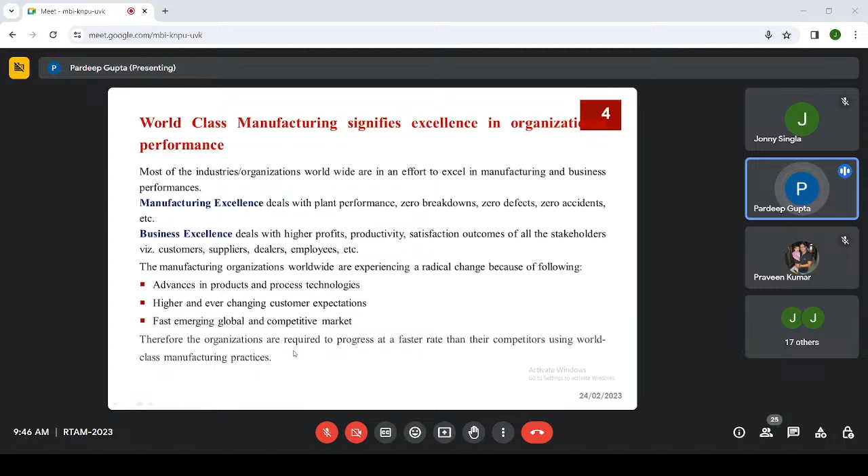There are advances in product and process technologies; both products and processes are advancing in a very rapid way. Higher and ever-changing customer expectations, which continuously change with time. And because of the global competitive market, there is cutthroat competition to reduce manufacturing cost, deliver better quality, and add new features. Therefore, organizations are required to progress at a faster rate than their competitors using world-class manufacturing practices.

Under world-class manufacturing, there is the concept of smart manufacturing. Smart manufacturing refers to the use of advanced technology and data analytics to improve the efficiency, productivity, quality, and flexibility of manufacturing processes. It involves the integration of various cutting-edge technologies such as automation in manufacturing and business operations, Internet of Things, artificial intelligence, machine learning, robotics, 3D printing, etc. These technologies may help produce goods more efficiently with higher productivity across the value chain. That is why 3D printing has great importance.

And this course is very relevant in giving information to the participants, either to have discussions with students on 3D printing, or if somebody is interested in adopting this as a research area for their PhD or MTech thesis. So this course will be very beneficial to them.

What is additive manufacturing? Additive manufacturing, commonly known as 3D printing, is a revolutionary manufacturing process that adds successive layers of material to create a final product using digital 3D models. This technology has gained significant attention due to its versatility, cost effectiveness, and potential to transform manufacturing and other applications.

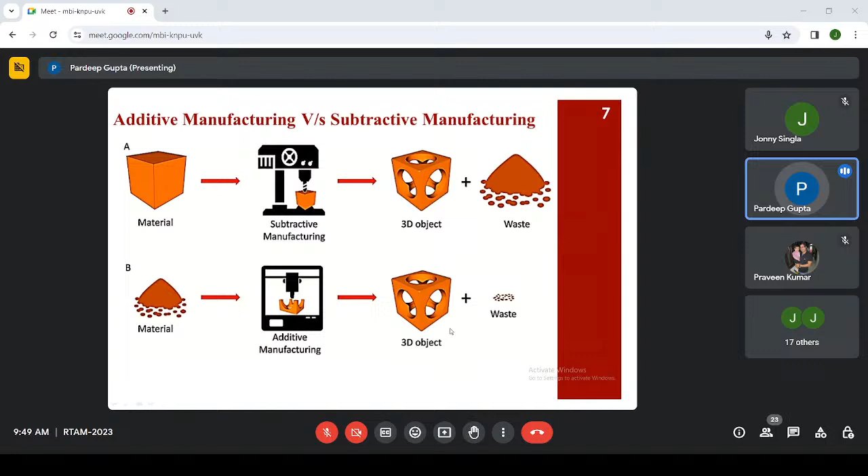So how does this additive manufacturing process work? Initially, we have to create a 3D CAD model using some software available in the market. This 3D CAD data is cut into numerous sections, and these sections are printed one over the other to get the final component.

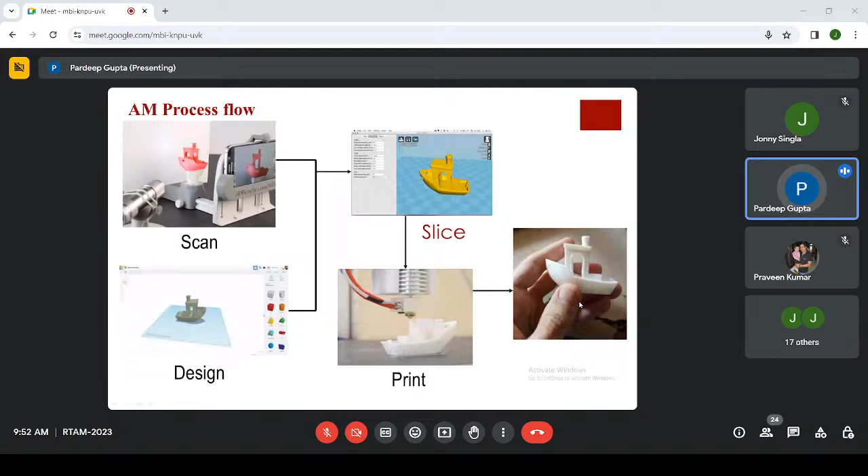This is again the same thing. First, through scan, we can scan the 3D object. From that, we can prepare the 3D model. Then slicing is done. After slicing, through this printer, the printing is carried out. That is how this 3D printing process works to create required components or parts.

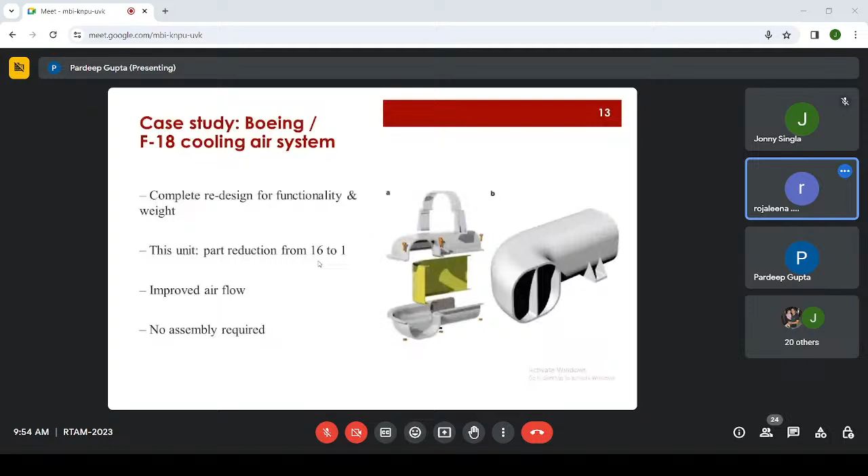When we are designing this product, the stress, fatigue, impact strength, etc. are all taken care of. So naturally, the components fabricated with the additive manufacturing process are better than the parts manufactured by the conventional machining process.

So all these things are taken care of during the designing of the 3D model of the additive manufacturing parts to be manufactured.

So now we will discuss the opportunities of utilization of 3D printing.

Overall, 3D printing technology continues, and its applications in engineering and manufacturing are expanding rapidly, offering new opportunities for innovation and efficiency across numerous sectors.

As you can see, there are a number of possibilities for applications of 3D printing.

It can be used in making prototypes, toolings, and jigs used in industry. Even supply chain optimization, repair and maintenance of equipment, automotive and aerospace have a lot of use, consumer goods, product customization, low volume product production.

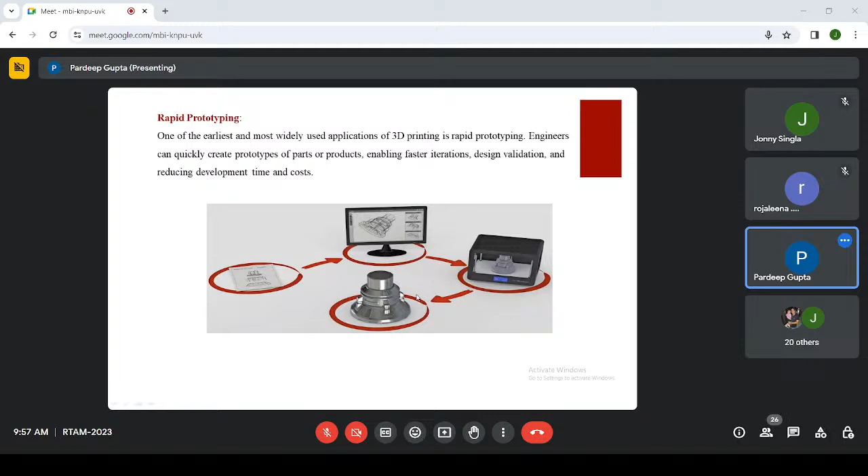So customization - 3D printing can be used to customize products. These may be needed in various areas, for example, in healthcare.

In healthcare, if somebody needs some plaster or some extended part of the body, that can be fabricated with 3D printing as per the size required for the specific person.

Again in medical, some components can be fabricated by additive manufacturing. In dental, 3D printing is being widely used in dental applications.

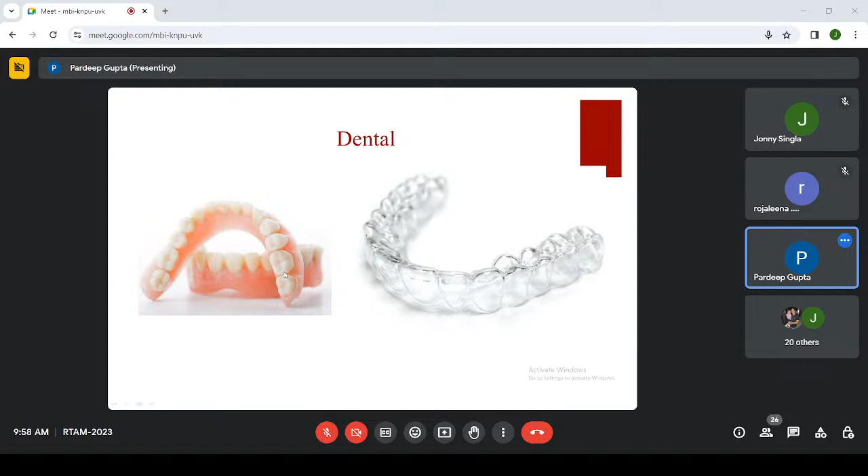In preparing jaws and some implants, etc. Even hip bones can also be created with the 3D printing process.

In construction and architecture also, 3D printing is now advancing like anything. Bridges, some houses, and small scale models of buildings can also be created with the 3D printing process.

In the food industry, 3D printing is finding applications in making cakes, being used for making layers of chocolate or cream over the cake.

Where some props have to be created, this additive manufacturing technology can be used to create a few items as per the requirement.

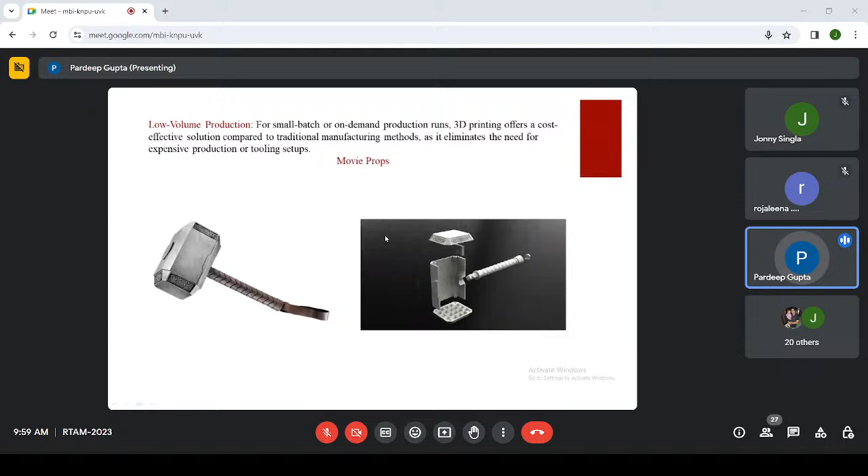Next, 3D printing is finding big applications in the automotive and aerospace industry.

These industries benefit from 3D printing for lightweight and complex parts, enabling design optimizations that can improve fuel efficiency, performance, and reduce overall weight.

In the case of aircraft, the total assembly can be created with the help of additive manufacturing. 3D additive manufacturing is finding big applications in aerospace.

So whenever some space shuttle is being launched, the 3D printer goes along with that.

So that if any damage takes place to any component during the journey, it can then be fabricated by making use of the 3D printing process.

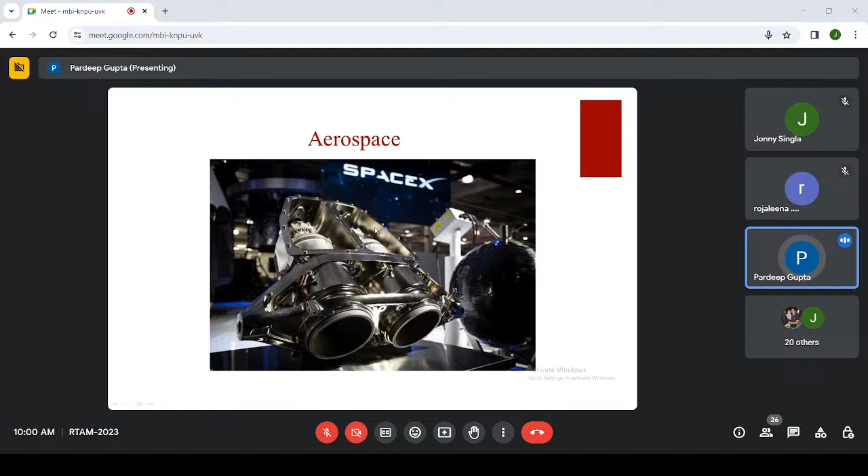So it has good applications in the aerospace industry also. You can see in space shuttles, the printers are being used to make some products to maintain the spacecrafts, etc.

In making some consumer goods like in the fashion industry, dresses can be created, some special dresses can be created by making use of 3D printing. In making some jewelry items, this technique can be used for making very innovative jewelry items.

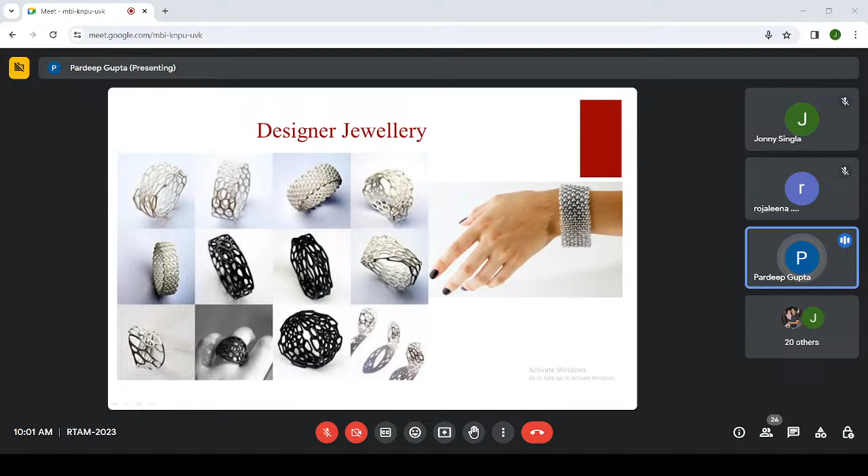Consumer products like your mouse or the cover of the mobile phone, some intricate parts or decoratives can also be created by making use of

additive manufacturing process. So these are some specialties which can be used in our homes.

Additive manufacturing can be a very useful technique in optimizing the supply chain. It allows for decentralized manufacturing by enabling production of parts or components closer to the point of use. Suppose I need a component to be used in Chennai, there's no need to construct that component in Punjab. It can be fabricated near the location where it has to be used, mitigating risks associated with centralized manufacturing.

In education and research areas also, 3D printing is finding wide applications. It has become an essential tool for educational purposes and research institutions, allowing students and researchers to experiment, visualize complex concepts, and develop prototypes for various experiments and studies.

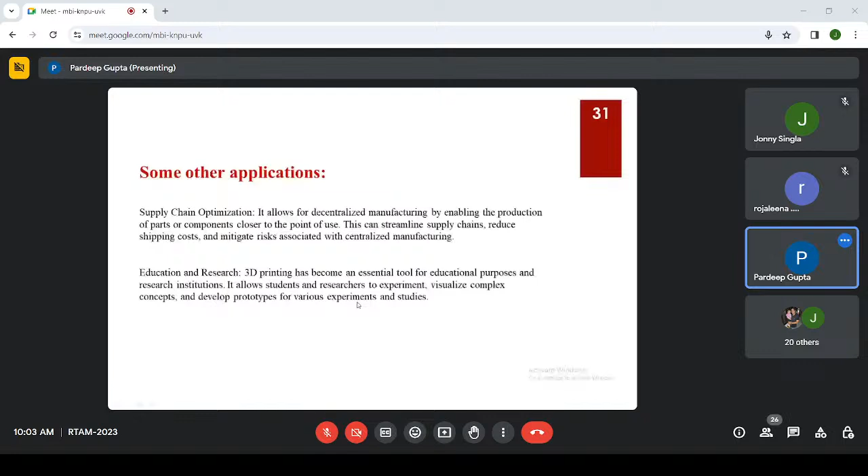Now we'll talk about the challenges associated with 3D printing or additive manufacturing. The first limitation is materials limitations. Conventional materials cannot always be used in 3D printing because of strength issues and finishing issues. The range of materials available for 3D printing is still limited compared to traditional manufacturing. Developing more diverse and high performance materials suitable for different applications remains a challenge, opening up possibilities for advanced composites, metals, ceramics, and biocompatible materials with enhanced properties tailored to specific applications.

Quality control is also an issue. Ensuring consistent quality across 3D printed parts is crucial, especially in industries like aerospace and healthcare where precision is paramount. Controlling factors such as porosity, layer adhesion, and surface finish remains a challenge. Sometimes 3D printed parts may not be as strong as those created with conventional machining because of layer-to-layer bonding and surface finish issues. These are the big challenges.

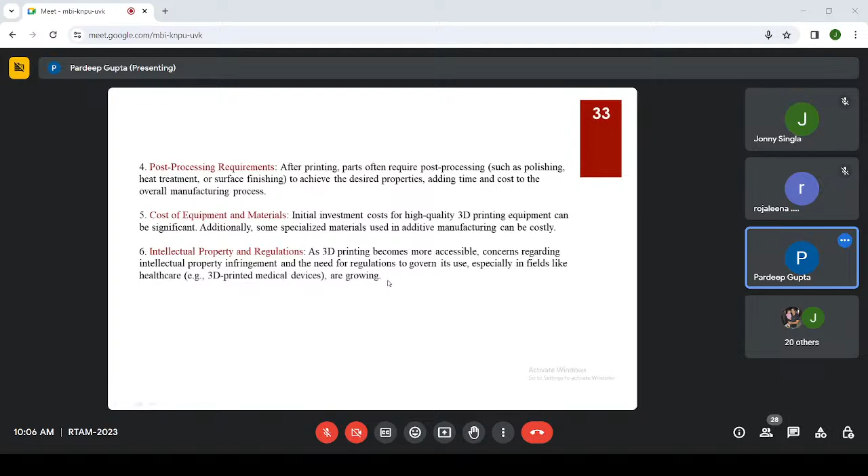3D printing offers a number of benefits, giving us some financial benefits as well as some technical benefits. Talking about financial benefits, the first one is getting products to the market at faster rates.

3D printing organizations can quickly and affordably produce prototype functional parts. Once a design is prepared, this technology can be used to produce tools, fixtures, and other parts that can produce products at a faster rate. By shortening the product development cycles, organizations can generate more revenues, basically making production processes faster.

Reducing manufacturing cost: manufacturing of components requires skilled labor, advanced machines, and traditional tooling that involves higher costs. Metal 3D printing increases flexibility in manufacturing and allows for producing complex parts with ease, helping organizations produce parts at more affordable prices.

Replacing inefficient manufacturing workflows: 3D printing metal parts will help organizations become more dynamic and responsive.

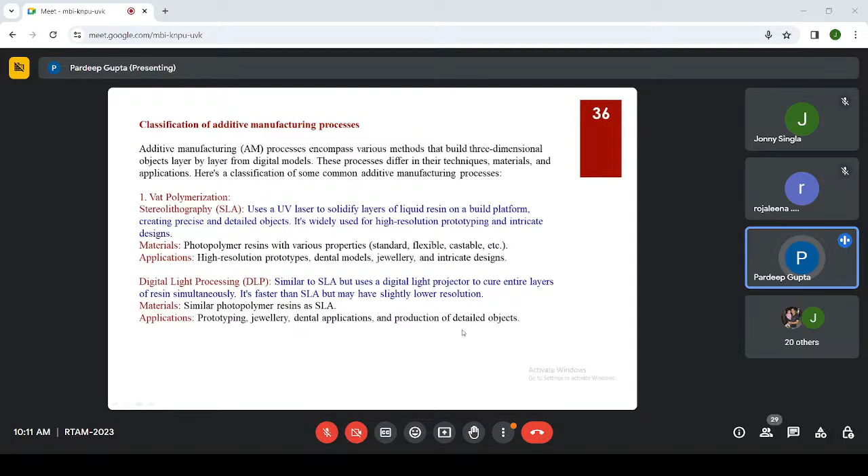The second category of processes comes under the heading material extrusion. It is a kind of extrusion process. The first process is fused deposition modeling, the FDM process. Basically in this process we are making use of filaments, which are extruded through a nozzle, and deposited layer by layer in the chamber to create the 3D models or objects. It is the most common and accessible method, extruding thermoplastic filaments through a heated nozzle layer by layer. FDM is used in various industries for prototyping, tooling, and end-use parts. The materials used are polylactic acid, PLA, ABS, and some other thermoplastics. The applications: prototyping, manufacturing, functional parts, educational purposes, and hobbyist use.

The next category is pellet extrusion. It is similar to the FDM process, but the only difference is that FDM uses thermoplastic filaments, while this process uses plastic pellets instead of filaments, offering potential cost saving and material diversity. Here mixing of the pellets is possible, so we can make use of this process in a better way as compared to the FDM process.

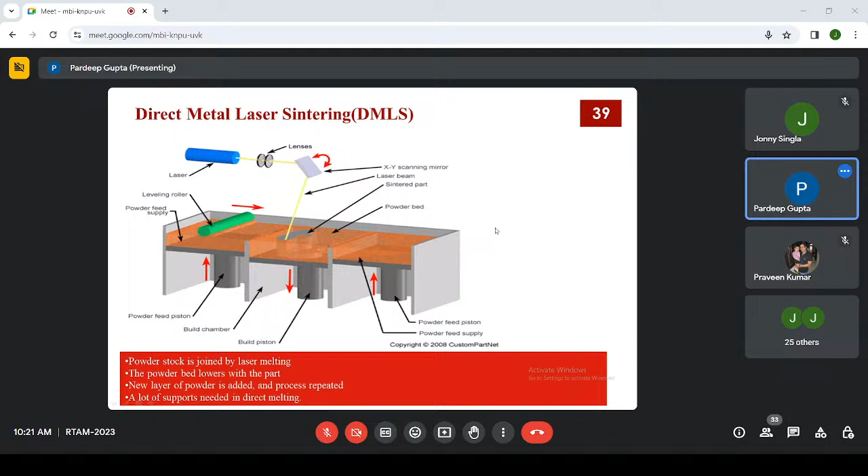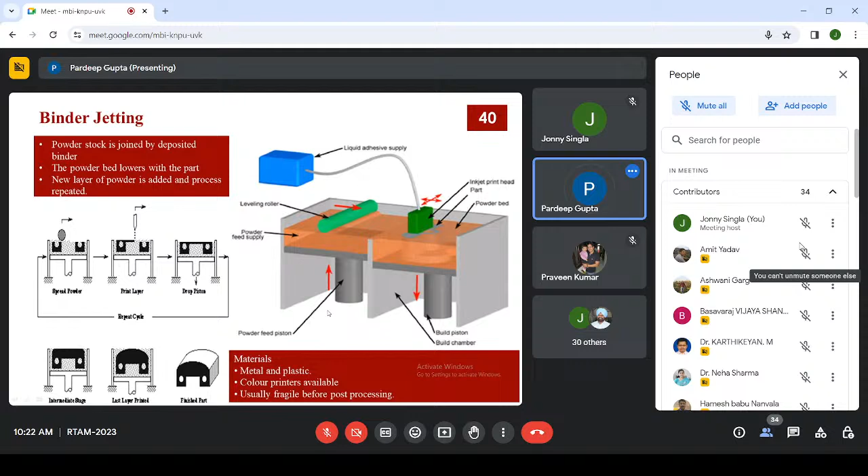Slowly a number of layers can be laid to create the final product. Slowly this build piston or build chamber will go down, and the final product will be made available for use. These are some of the examples created with the help of the binder jetting process.

In the welding area also, there is wire arc additive manufacturing. It is a kind of additive manufacturing process. In this process, the wire is being... wire arc additive manufacturing is basically a kind of welding process. In this process, we make use of a robot. This robot is configured to make layer upon layer. Here in this figure, you can see a number of layers are laid to make this block.

So in this, we can make use of stainless steel, nickel-based alloys, titanium alloys, and aluminum alloys. Some special metals can be used for making the end products for some specific applications.

So with the help of this robot, this is using a tungsten electrode, and a metal wire is coming to the hot area. So this weld pool is being created, and we can lay the layers like this. So very complex solid components or maybe walls can be created by making use of this process.

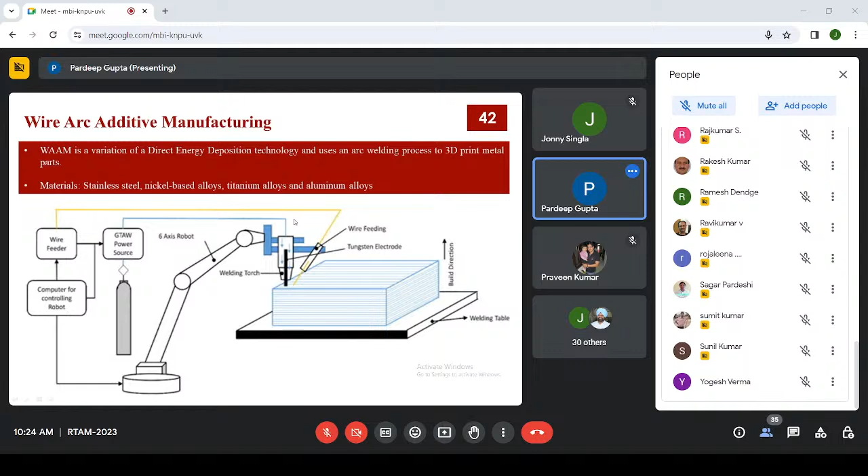So basically at SLIET Longowal, we are having this machine with us, and a good number of people are working on their PhD thesis, as well as some MTech theses are going on with this machine.

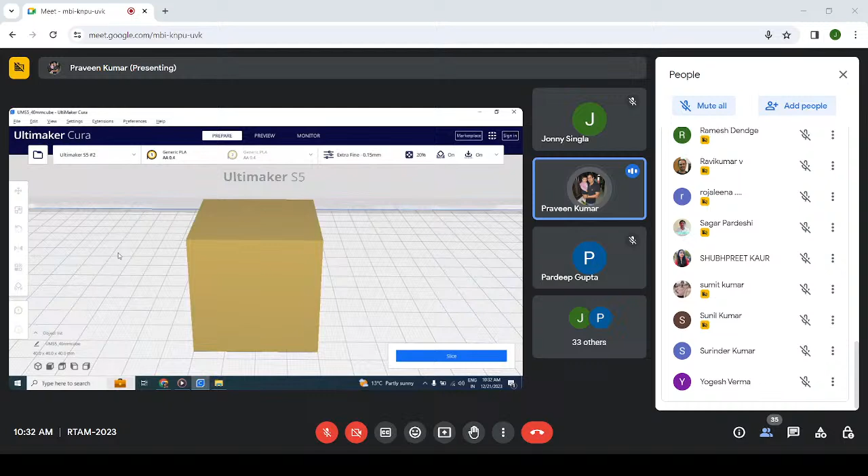One of the famous slicing software is Ultimaker Cura. I have already downloaded this software, and I have already uploaded the STL file of the model from the previous one. So I'll tell you this from the scratch point of view. From the laptop side, you can see the number of printers, and you can add your printer too by clicking on add printer.

When we click on add printer, we get some options like add network printer or add non-network printer. Please go to add non-network printer. Here you can find various brands of printers already listed in this slicing software. So you can choose your brand, and accordingly you can register your printer into this slicing software. Like we have Ultimaker S5 in our laboratory, so I'll choose this Ultimaker S5, then I'll add this. So the Ultimaker S5 is already added.

After that, we need to just upload this STL file. I can show you how I have uploaded. File, then open file, downloads. This is the STL format file, and this is how I have uploaded it.

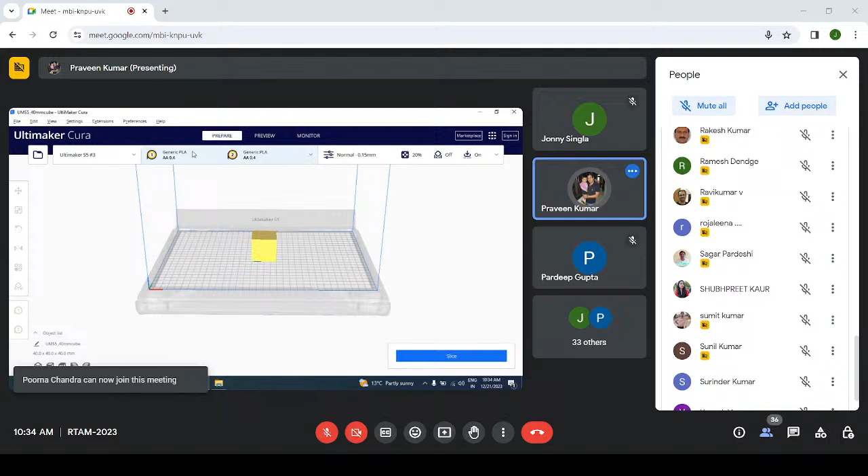After uploading, as Ultimaker S5 is a twin extruder, meaning it has two nozzles, we need to define from which nozzle we have to print. We can see here there are two nozzles, 1 and 2. You can enable either 1 or 2, or if you want to print with different colors, you can enable both nozzles. So one layer can be printed from one nozzle, and another layer can be printed from the second nozzle. For this nozzle, you can choose the material too.

Like here I have chosen the PLA material. You can use other materials like ABS, nylon, PC, PETG, PLA, and others. Besides this, we have to mention the print core. Print core means the nozzle we are using. Here we have already chosen the AA 0.4. 0.4 indicates the diameter of the nozzle. Here you can use the 0.2 diameter nozzle, and here you can use the 0.8 diameter nozzle.

And AA defines the nozzle's material. AA is used for the polymers, BB is used for the supporting materials, and CC is carbon core, which is used when we are extruding reinforced materials like metals, carbon fibers, glass fibers. These carbon core nozzles are different from these other nozzles, because if we use the simple nozzle for extruding the metal

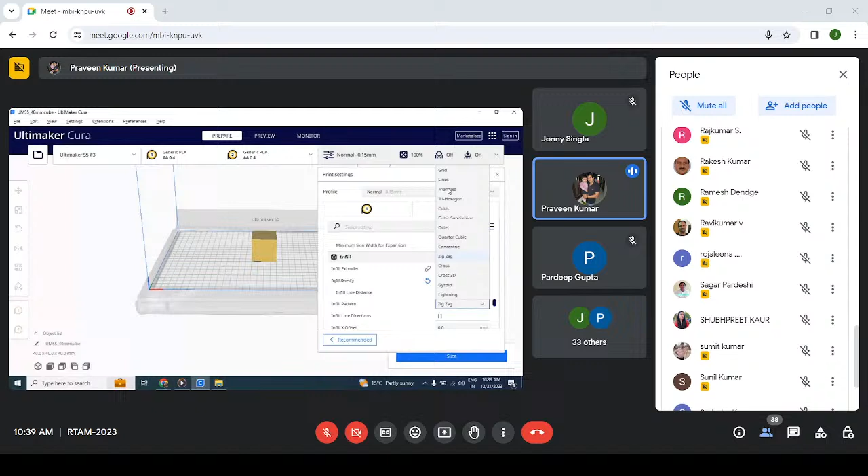And the material, the PLA, is generally melting at 200 degree temperature. We use the nozzle temperature as 200 degree, build volume temperature is 28, and the bed temperature is 60 degree. So there is no overhang part, that's why this function is not working here.

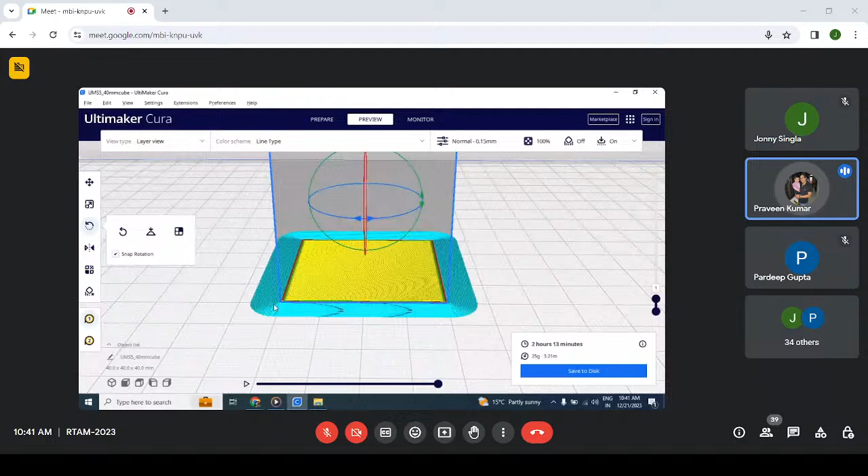Okay, now just slice it. I'll show you how this is going to work. From the blue part, you're seeing it. This is our brim. When we are adding the first layer on the surface of this build plate, it won't stick to the surface. So to keep the object adhesive to the surface of the build plate, we need to add this brim. This is only a single layer of the material, and it will keep the object adhesive to the build plate.

So here you can see the first layer, the red one, this is the outer layer of the object, and the green one, this is the middle layer of the object, and the yellow one, this is the innermost layer of the object. So these three layers combined are the wall thickness of the object. And in between these layers, the pattern is line. So they are all inclined at 45-degree. So this is the first layer.

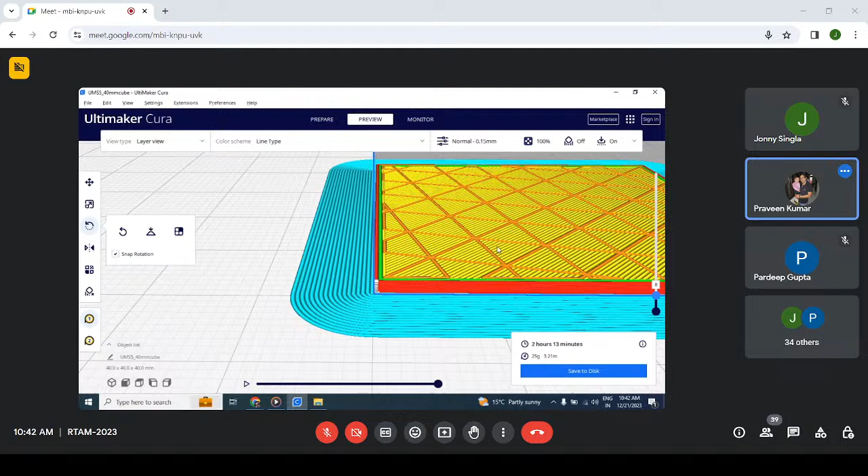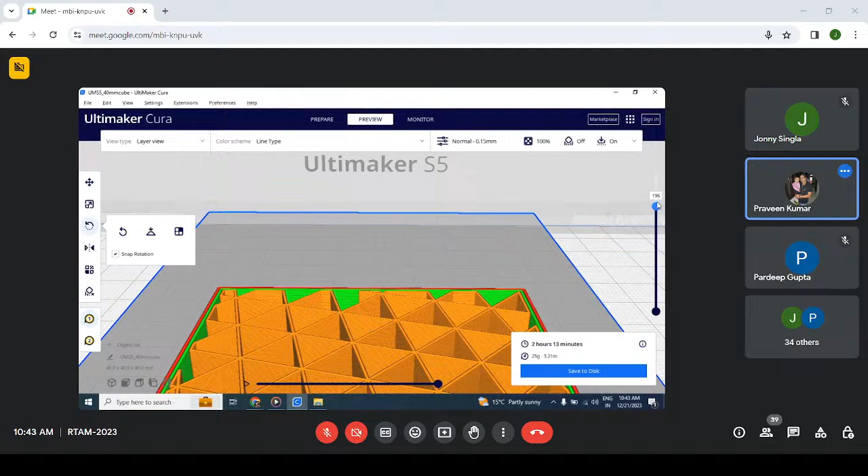And as it goes up, the uppermost 7 layers would be 100% infill. The topmost 7 layers would be the 100% infill pattern. These can also be changed. So here you can see these layers are aligned horizontally and parallel to the base edge of this object. So if your object is placed somewhere else, and that object is subjected to another kind of force, you can change the direction of these layers by inclining and positioning this object in some other styles. Like I'll show you.

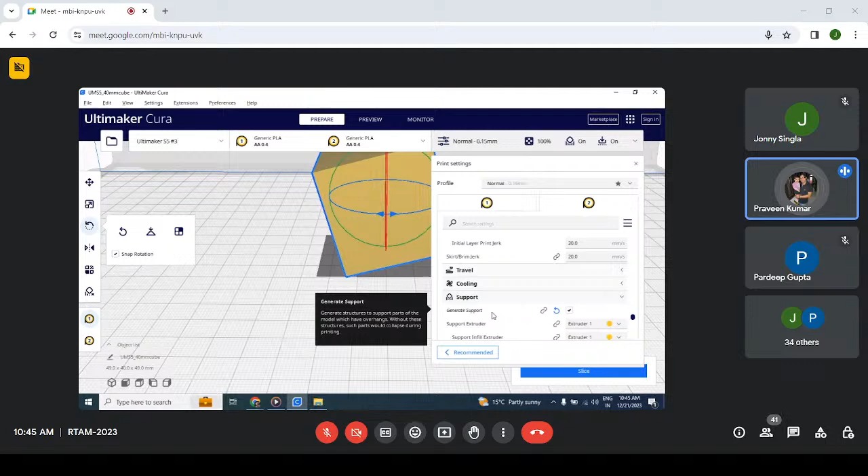Now I'll place this object at some angle. Okay. Now only one tip of this object is touching our build plate. So this part is overhang. So we need to support this part. So here we need to generate the support. So you can see when I tilt this object, then this function starts working. So I have clicked on generate supports. Now I'll slice it.

Now here you can see supports are created. Now the layers are inclined to the base edge. These are not horizontally parallel to this base edge. So according to the application, you can change this style of printing. And according to the point of application of the force, you can change the direction of these layers. So that is how you can get the strongest object with this kind of print.

So I have just made you understand how the printing parameters can be controlled, how temperature parameters can be controlled. All these settings have been done in slicing software. After the slicing, we just save this file to the USB, and we transfer this file to the printer. After sending this file to the printer, we'll start printing. I'll show you how I have done the printing.

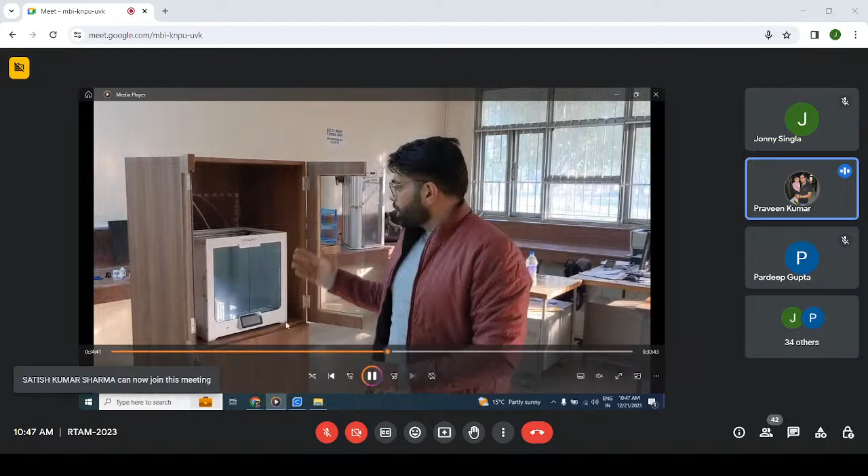So here you can see this is our Ultimaker S5 printer, and it works on dual extrusion. Now here you can see this is the metal filament, and it has a diameter of 2.85 mm, and this is a brass material that we are using. It is 83% metal and 17% polymer, and the polymer is added just to make the metal powder adhesive and in the form of a wire.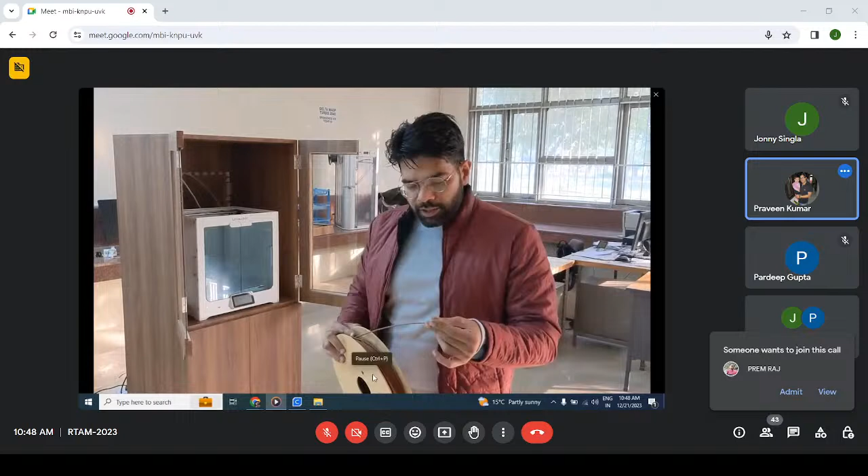So this wire has a diameter of 2.85, and this will feed into this printer to make the object 3D printed. First I'll show you how this wire would be fed into this printer. The fabrication of this wire can be done in an extruder, but this is a purchased one. Now I'll switch on this printer.

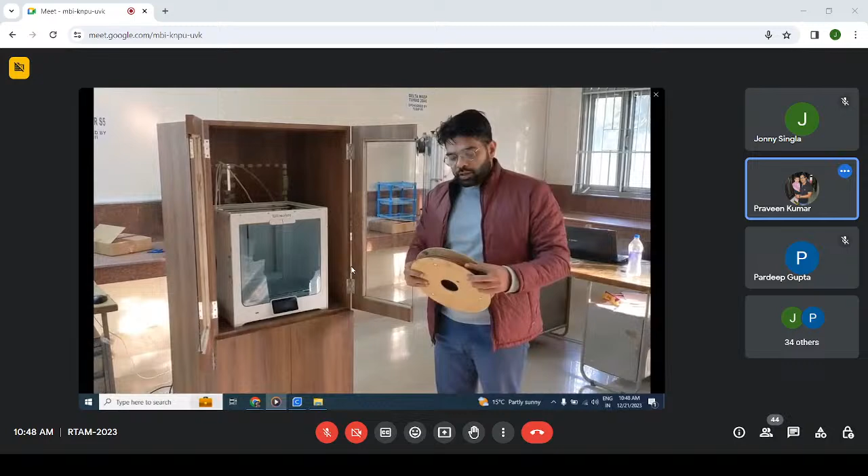This printer is working, the nozzle is moving in the XY direction, and the build plate has a movement in the Z direction.

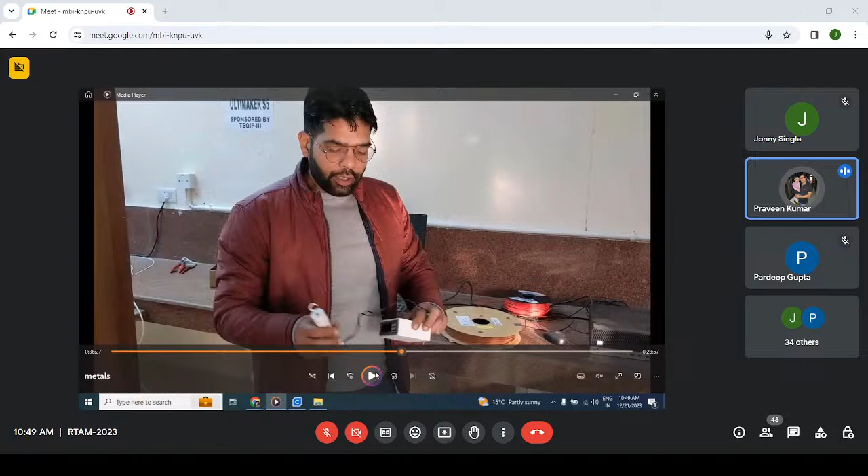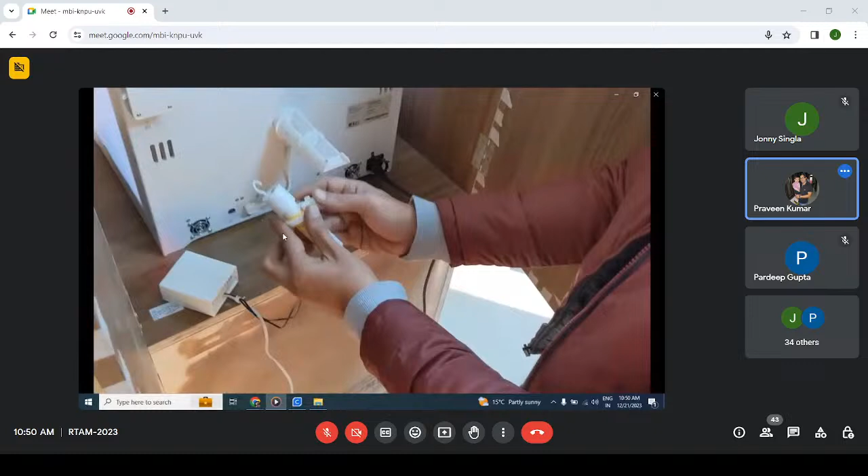So here you can see the temperature, and we will just place it. This is the bracket, and this bracket is also a 3D printed bracket. Here I already hung it, and we are just passing the wire through this warmer.

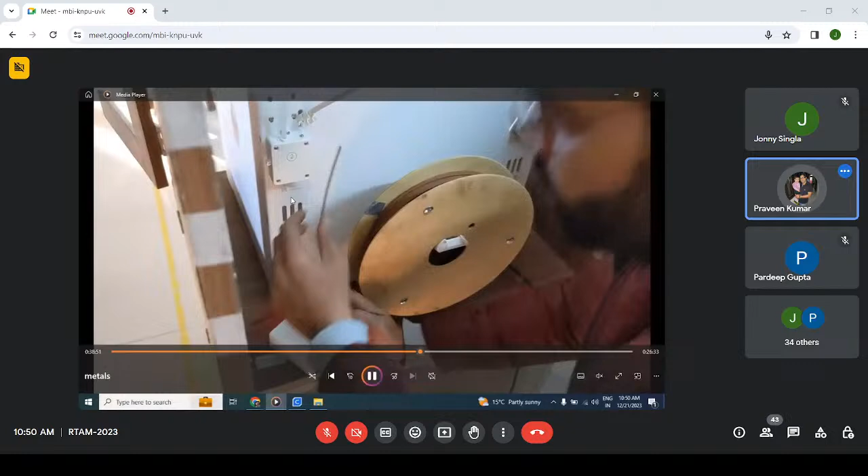After this wire passes through, we'll pass it through the feeder. This is feeder 2, and this is feeder 1. After the feeder, we just place it into the feeder, and we lock it, and it will automatically feed to the extruder nozzle. I'll show you how this is going to work.

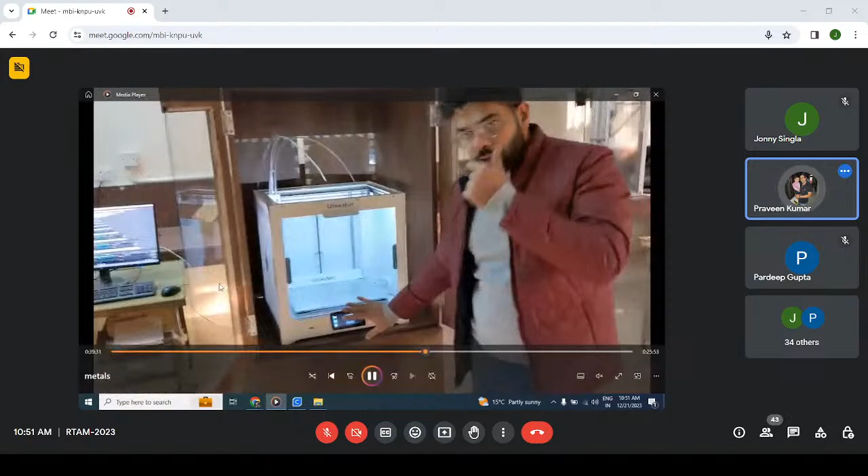Here you can see we have placed the wire on the feeder. Now I'll go to the printer setting. So on feeder 2 I have placed it, so I'll select the 2 part. This is the first one, and this is the second one. So I'll select the second one.

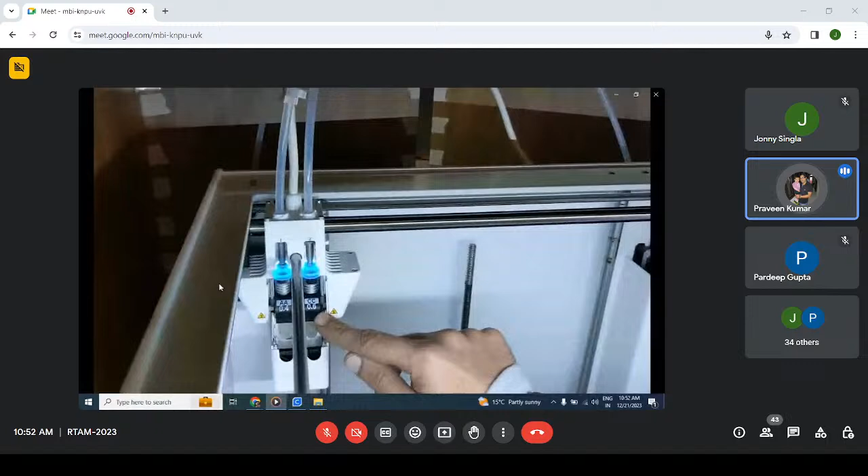This is our nozzle head, and this is nozzle AA 0.4mm, and this is CC 0.6mm. Why CC 0.6? Because we're using the metal wire to print, so we need to change the nozzle. That's why I have used this CC 0.6. And this print head has movement in the XY direction.

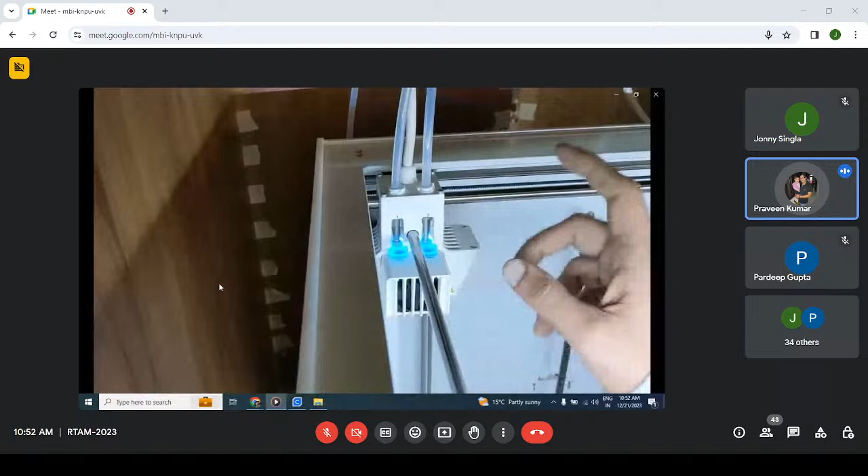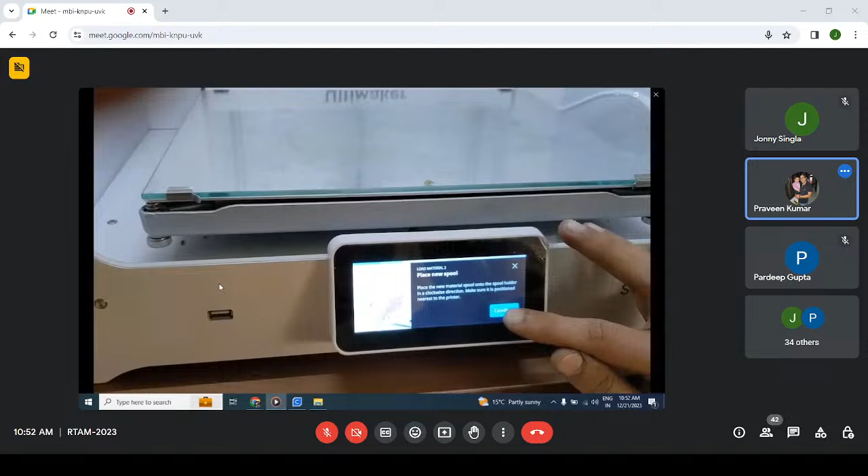Now I'll select the wire material. The material that binds the metal powder is PLA, so we need to select PLA here. We already placed the spool in the back. Now I'll confirm it. Here I'll select the PLA material because the pasting material, the binder, is PLA. So I'll select the PLA material. Now I'll confirm it.

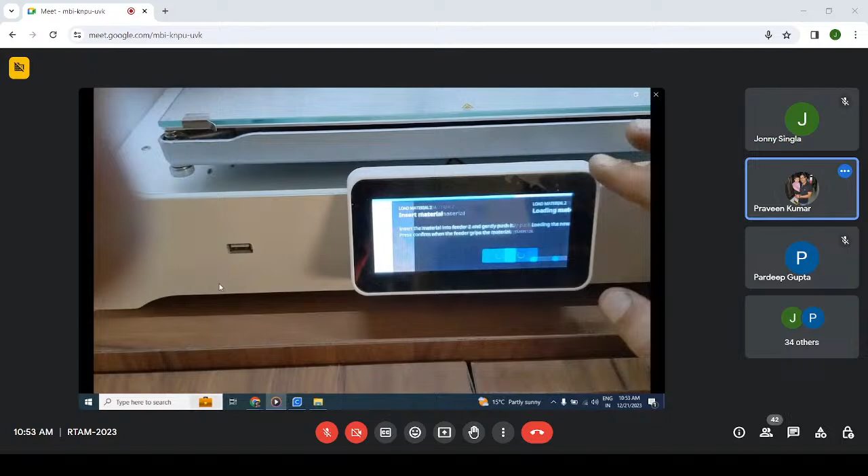So we have already inserted the material into feeder 2. We just gently push it. Confirm. Now feeder 2 will start rolling and feeding the wire to the nozzle through this pipe.

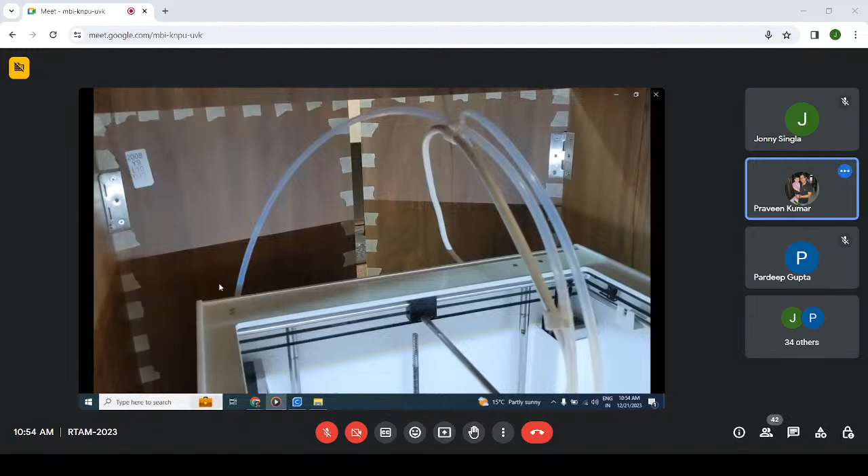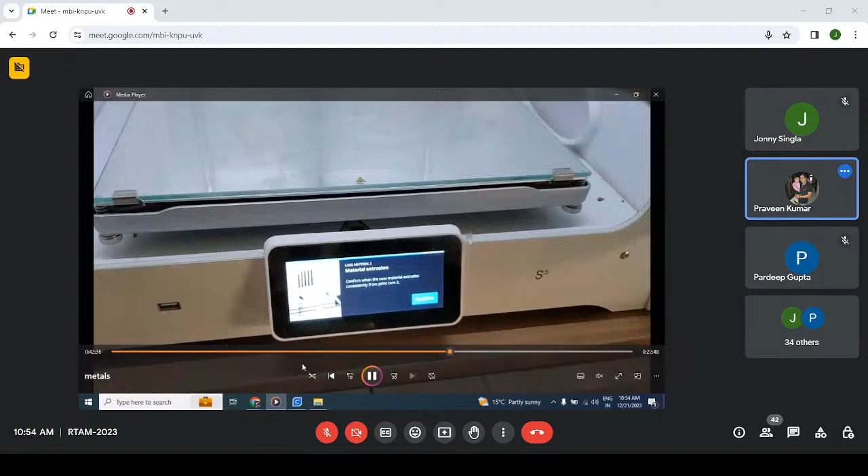First, it will preheat the nozzle so the material can be extruded out, and it can be checked whether the nozzle is working or not. Here you can see the wire is coming and going through this nozzle, and it will start depositing the material too, because the nozzle is already preheated. Here you can see the wire is automatically extruding out because the feeder is continuously pushing the wire. So now you can confirm it.

And this is the glass type bed, and it has a temperature variation from normal temperature to around 150 degrees Celsius.

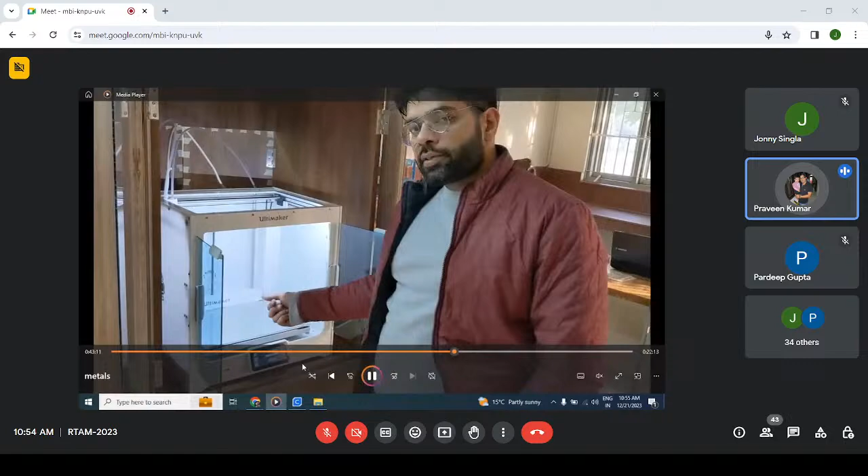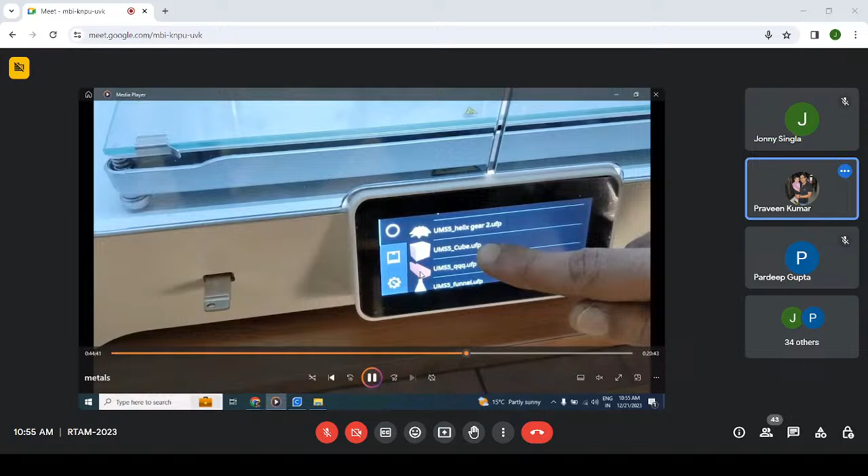Now we will place our USB into this printer, and we'll select the file to print. Now here you can see this cube, and we'll just select this, and it will tell you how much time it will take. This is 1 hour 15 minutes, and the material type is tough PLA. And the wire, approximately how many meters will be used - 1.32 meters will be used.

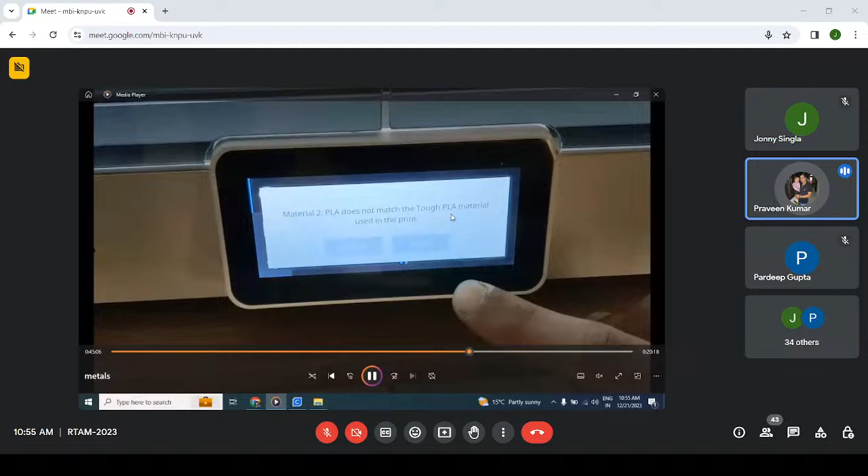Now before printing, it's just saying this, that the PLA does not match with the printer. Why? Because this printer is Ultimaker S5, and it always says to use the PLA material from the Ultimaker brand. If we are using some other brand, it will show this message. So just ignore it.

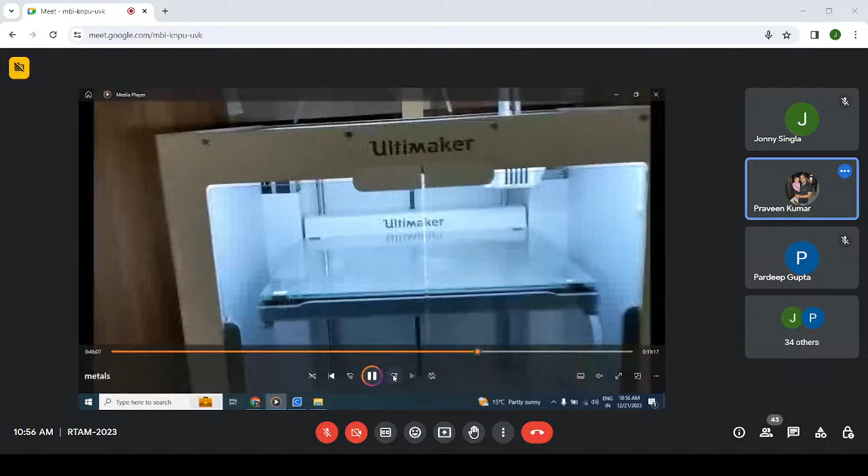Here you can see it just touches the bed and starts. On each and every point it will touch the bed, and it will auto level this bed according to the nozzle. Here you can see how it is getting leveled.

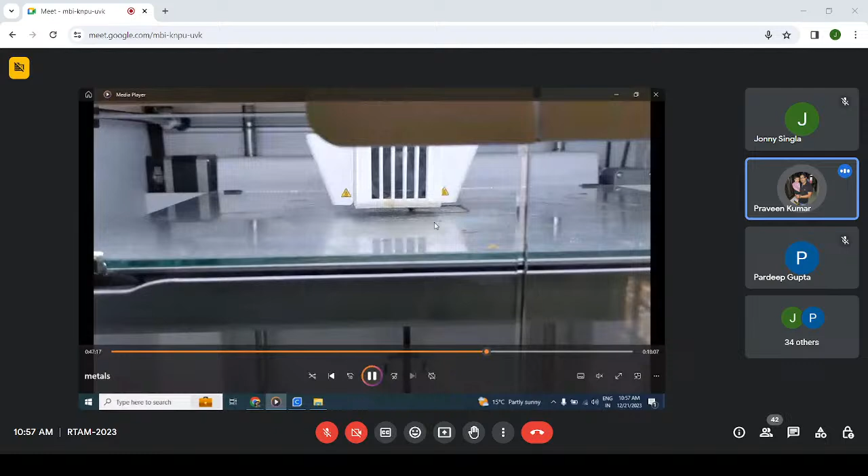Now this is the first brim part starting to print. After the brim part, the nozzle will print the object.

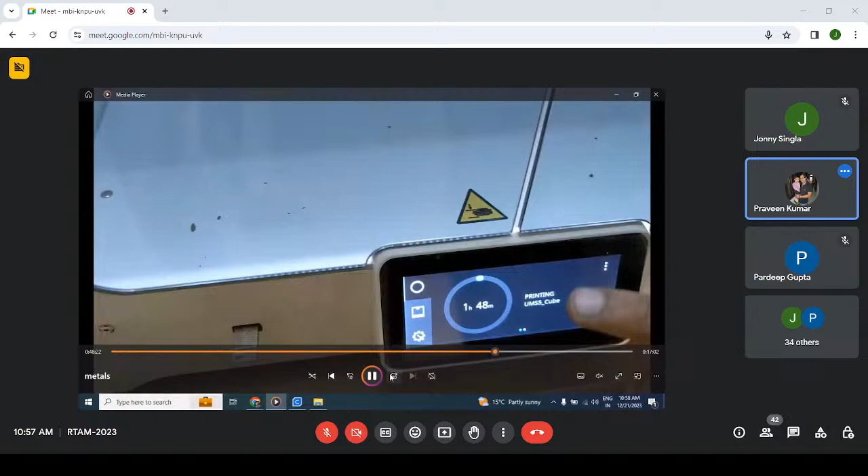So here we are printing from nozzle 2, and nozzle 1 is free. After some time, we'll just check it out. You can see how this printing head is moving in the XY direction and the bed is moving in the Z direction.

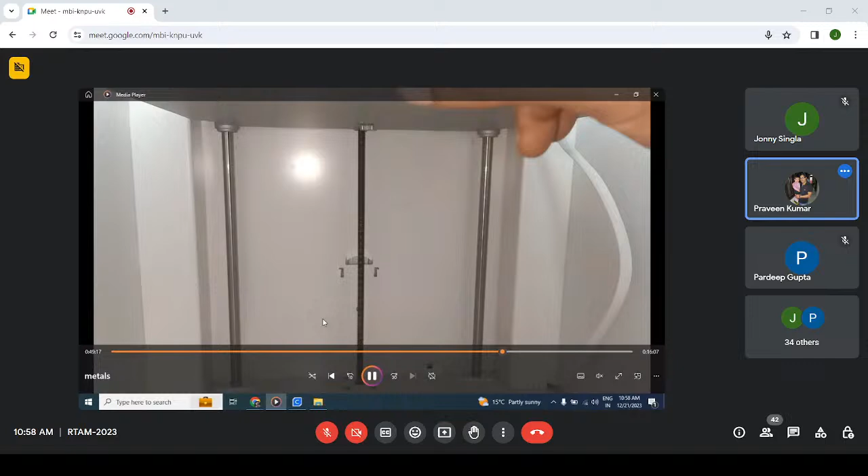In the Z direction, the movement of the bed is controlled through this screw. So the thread of the screw is very important—how precisely it is designed, how much it has to go up and how much down. The error is controlled by the precision of this screw, and all the movement of the print head and the bed is done by this stepper motor.

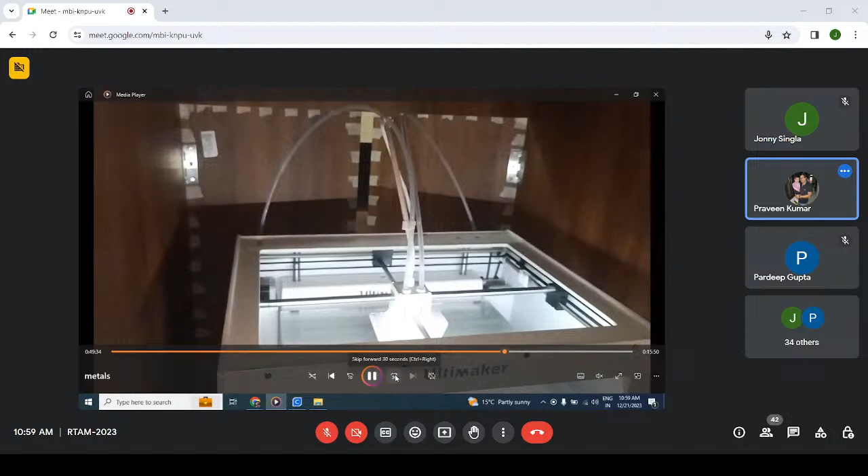Now, after some time, we can check it out. The printing has been done. Now we will remove this part. Here you can see this brim material is PLA. Right now the bed is heated. If you try to remove this PLA material while heated, it won't come off, because in the heated position the PLA is more strongly adhesive to the glass. So if you want to remove the PLA material, you have to wait till it cools down.

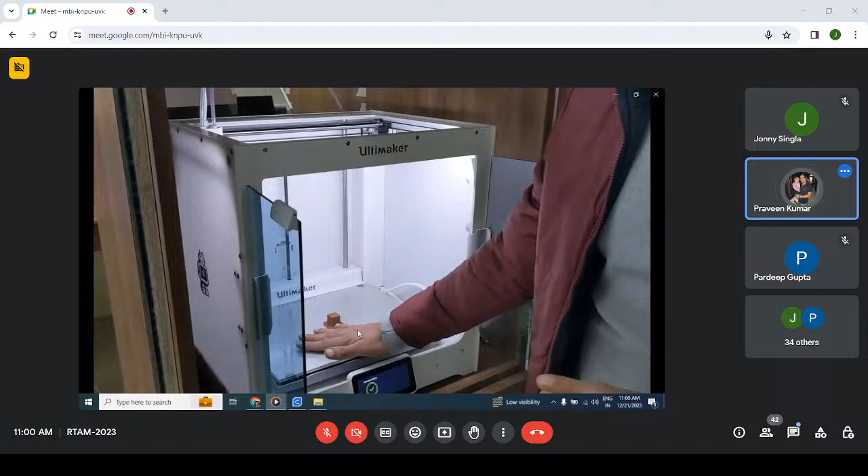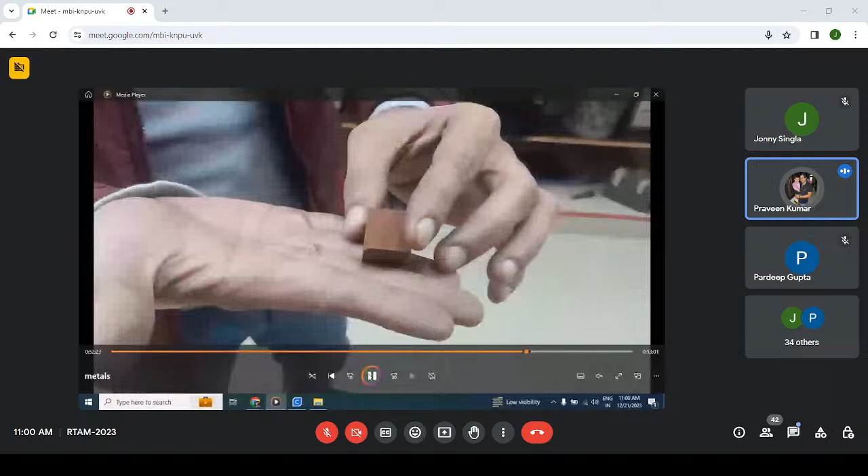Now I have removed this material from the build plate. This material is 3D printed, and it has 83% metal and 17% PLA polymer as adhesive. So this part is not strong enough, and we need to remove the polymer part. For removing the polymer part, we need to do the sintering. So we will just start the sintering process.

You can check out the finishing of this printing. This part is very smooth because the base was put on the glass plate. That's why the base is very smooth.

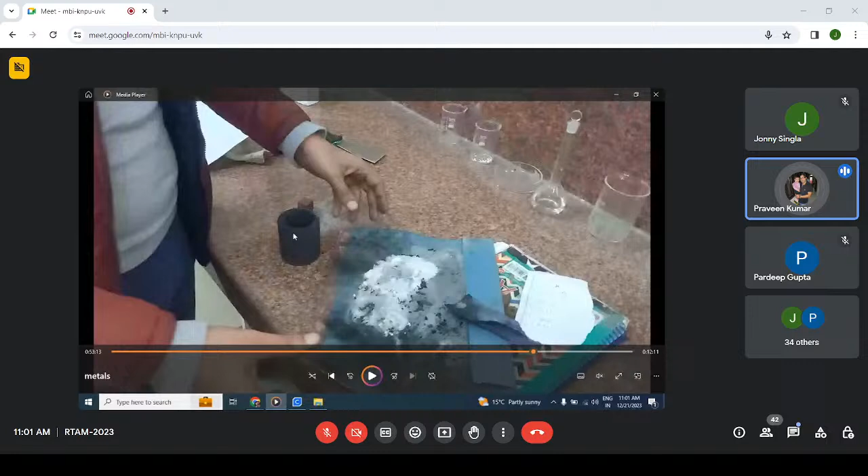So our crucible is ready, and we just place the crucible. We place this object into the crucible. But before placing the object in the crucible, we need to create an environment first. The environment I am creating here is aluminum oxide, just so as not to oxidize our object. So first we put a layer of aluminum oxide.

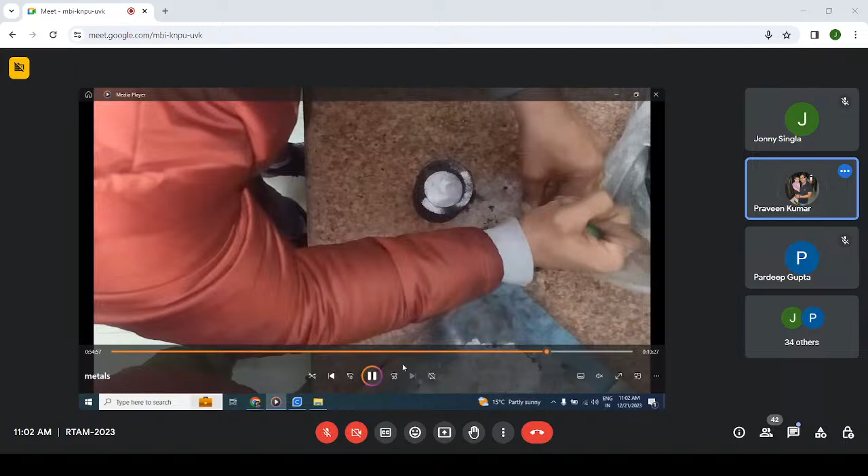After putting the first layer, I'll place the object, and I'll keep one layer of aluminum oxide around the object. After covering the object with aluminum oxide, now I'll cover the object with another layer, that of carbon. So we'll take charcoal, crush it into small particles, and spread it over the aluminum oxide in the crucible.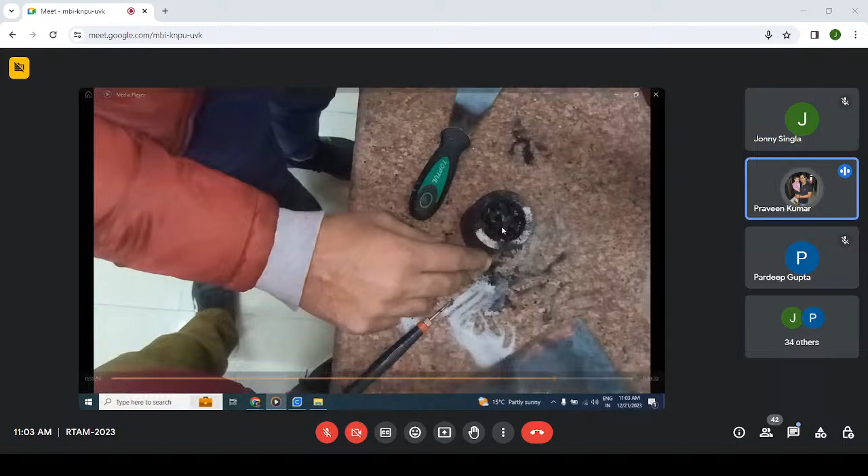These coals are spread over the aluminum oxide, so that the direct heat of the sintering oven won't disturb the object directly. Instead, it will first give heat to the coal, and the coal's heat will transmit to the object. So we'll cover it very gently. After covering it, we will place this crucible into our sintering oven.

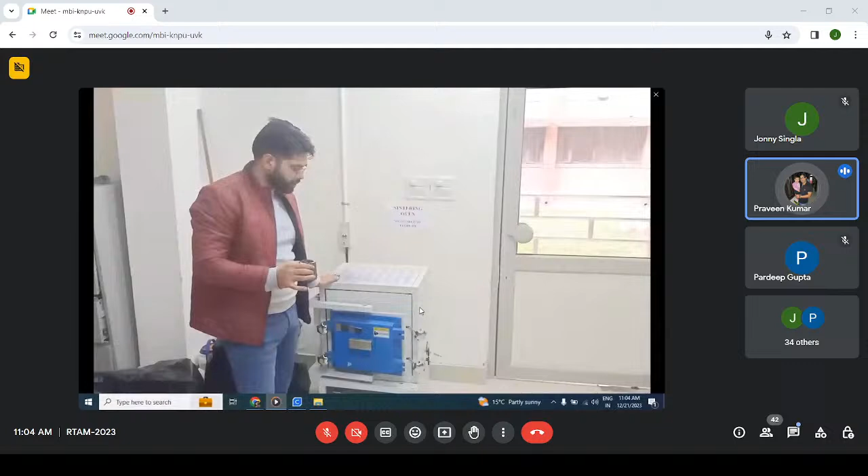And this is our sintering oven, and it has a capacity ranging from normal temperature to 1400 degrees Celsius. We'll place it.

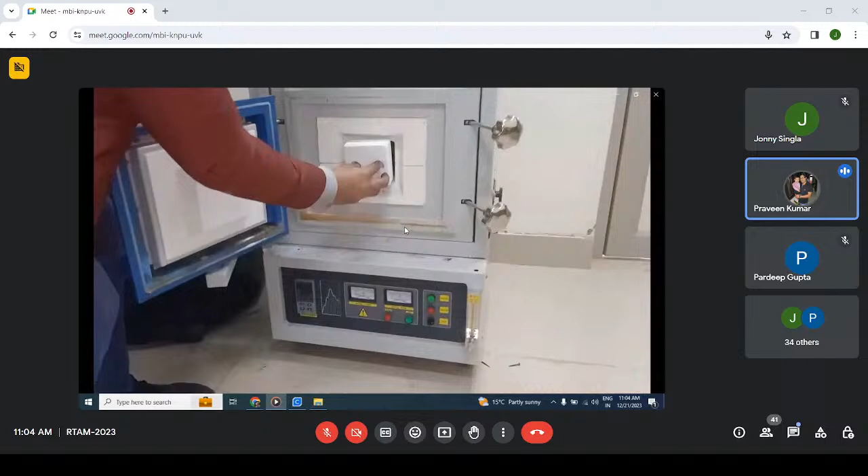After placing it, we need to create a heating cycle—at which temperature we need to hold, and for how many hours. This is the experimental part that I have done; after lots of experiments, I have achieved the final temperature cycle. Now we'll close this gate.

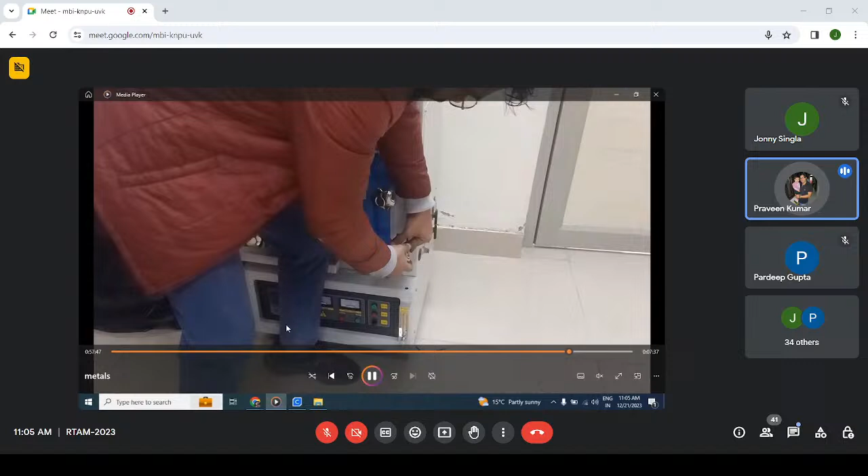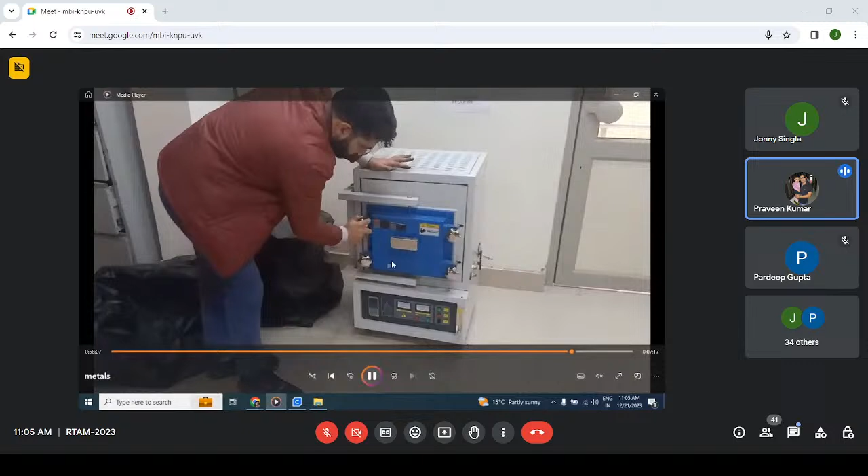After closing it, we will set the temperature cycle through the PID controller. This oven has the facility of a PID controller, and also the facility of vacuum sintering and other environment sintering. For example, if you want to do the sintering in argon or an inert gas, this has the option through this pipe, and we can create that environment too.

Now we'll switch this on. Now, through this PID control, we'll set the temperature.

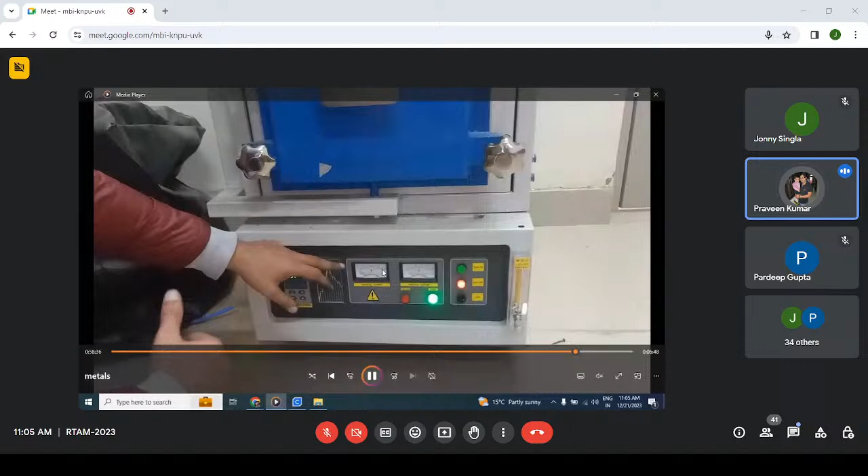Here you can see there are two needles, one for the voltage and one for the ampere. Now here you can see 0 to 120 degree.

I have set it for 1 hour. That means in 1 hour it will rise from room temperature to 120 degree. After 1 hour, it will take another hour to go from 120 to 240 degree. After that, in another hour, it will go from 240 to 360 degree. So accordingly I have set these temperatures.

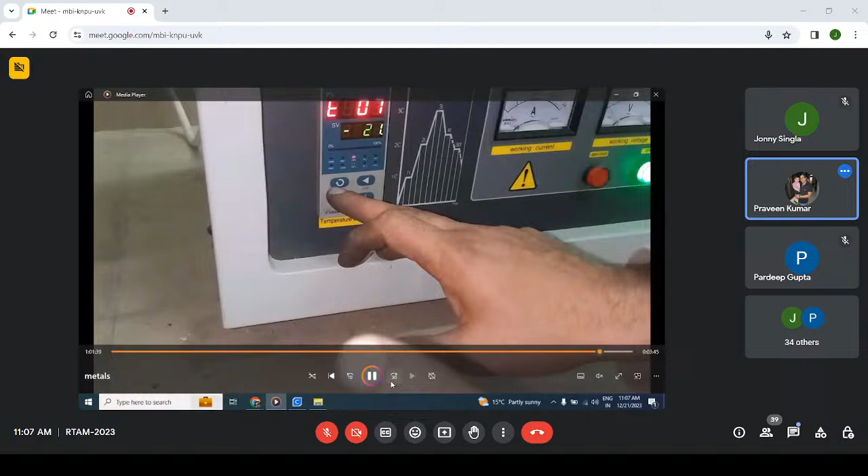So we'll set this temperature, and minus 121 means the program will end. So now I have set all this. Now I'll run the program.

So here you can start to see this 0% to 100%. There is a light blinking, and it shows that it has started. Now it is increasing, and here you can see the SV value and PV value. SV is the set value, meaning the target value it will set, and PV is the value it will achieve.

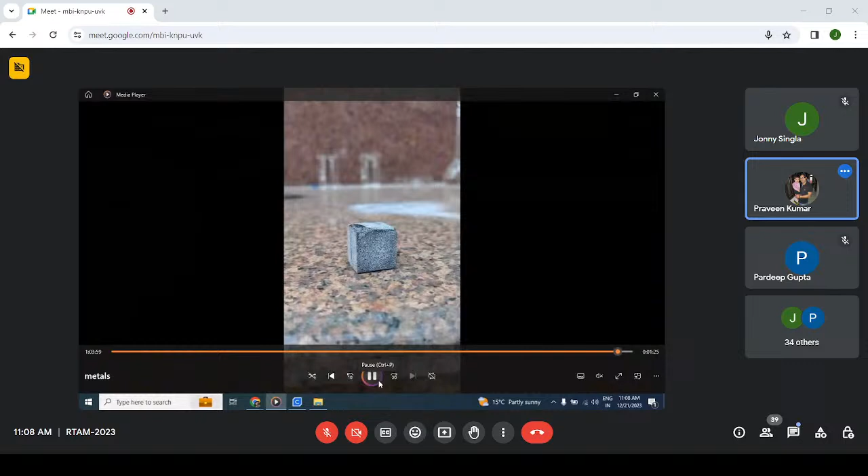After this, I'll show you how this works. Just a second. Now we have already set the temperature, and we'll start the program.

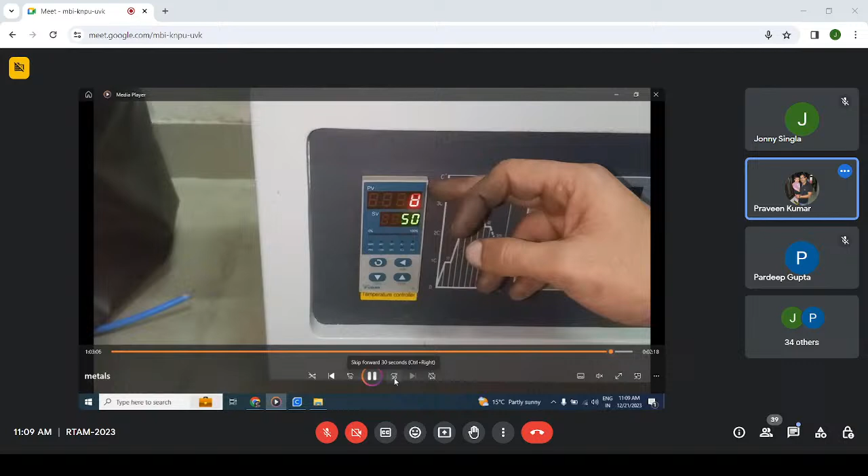After this, when the 10 hour program reaches its final stage, we'll wait for some time to let it cool down, and after 2 to 3 hours of completing the cycle, we will bring the object out from the sintering oven. I'll show you.

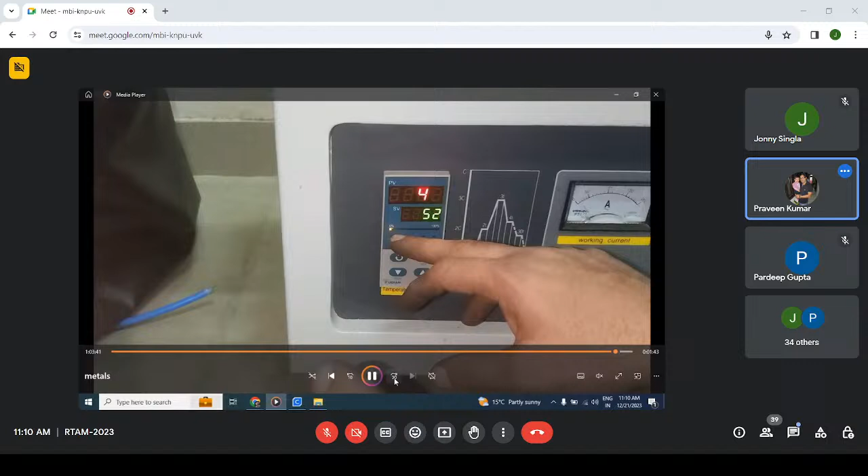So here you can see the bar is continuously increasing. It means the cycle has started.

Machine... and this is the final part that is sintered from the sintering oven. Now we will finish this and start the post-processing process, so that we will remove the carbon material from the surface of this object.

After the post-processing, I'll show you how it will look. This post-processing process is going on.

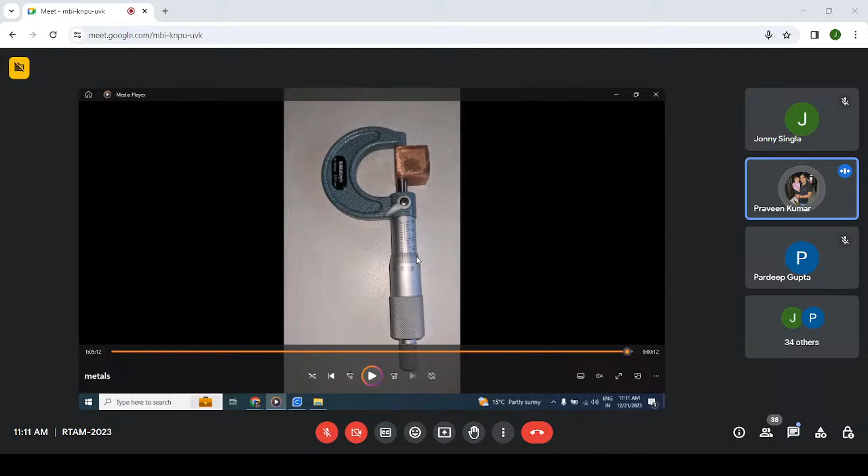Obviously, the dimension we have set is 70, but the final product loses somewhat around 17 to 18 percent due to the removal of PLA from this.

So here you can see our final printed and post-processed part, and you can see the finishing too.

So this is how we have done this 3D printing of metal through the metal fused filament fabrication process. This is all about the fabrication of metal printing. So if anyone has any query, you can ask me.

I have done. So if anyone has some query, you can ask me.

Sir, one question. During this layering process, can we go for some different metal or any oxides? I want to coat some metal oxides, high temperature metal oxides, along with some graphene oxides, reduced graphene oxide powders.

It can be done layer-wise with a thickness of around 5mm. You want to add some layers to the object? Yes, sir. Through sintering you cannot add, but in printing you can add those layers.